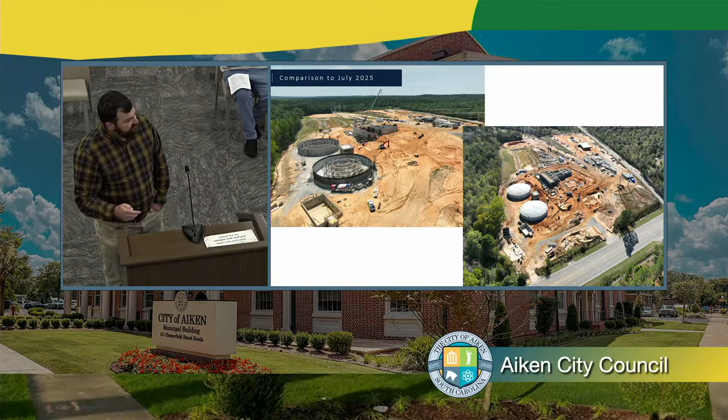The treatment structure concrete being complete is a big milestone for us - the concrete's poured out, that's the heart of the plant. There's a lot that goes into that. You see a small portion of the concrete, there's a lot underground, but that's now done as far as the structural concrete. The in and under for the water treatment plant, admin, and chemical building is on the right side of this photo. I'll get a better photo later to show that.

Clearwell and high service pump stations are now complete. The utility building masonry is done, roof is done - we have a photo of that as well. And the intake pump station on the other side of Highway 1 has now started.

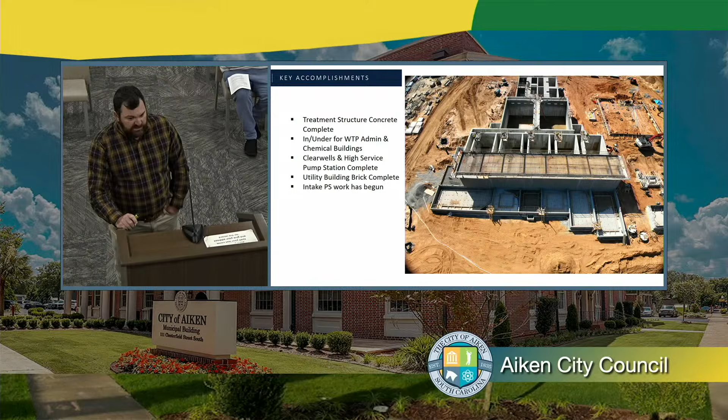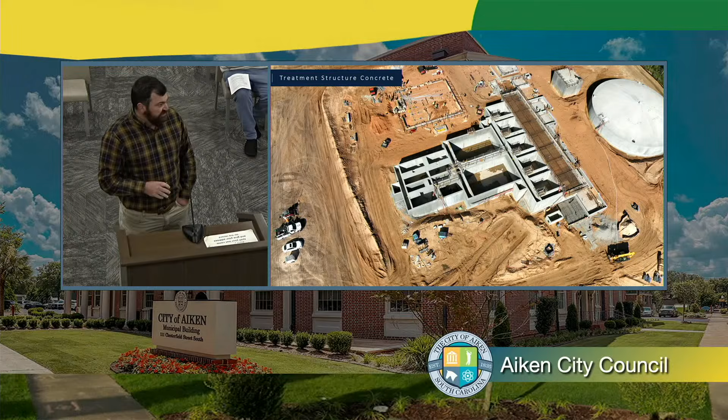So treatment structure - this is a pretty neat picture, it shows you the whole treatment process. Over here to the left, the small box is where the water will enter - that's your rapid mix. It goes through your flocculation, then your sedimentation, and then your 5 filters at the end before it leaves the treatment process. On the back end here is where your bulk chemical tanks will be, and they'll all feed into the chemical building up here on the top. Now that that is complete, you really see the flow and the process through.

Next phase, and I'll get into this a little bit, is a lot of the equipment that goes into it will be installed by the next quarter.

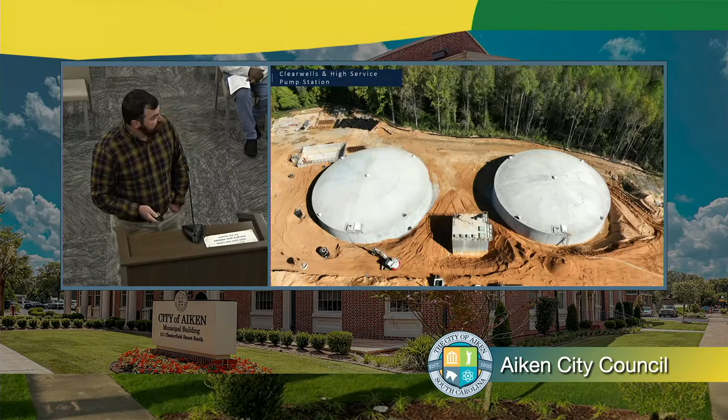Clear wells and high service pump stations - these are 2 one-million gallon clear wells each. Like I said, the one on the right, number 2, has now been tested and passed. The one on the left is currently being filled, and that should be tested and done this week. You see some backfill around these clear wells, which we've started to do.

Utility building - masonry is complete, the roof is now on and done. Coming up we'll have windows and doors. All the HVAC and electrical rough-ins is completed in that building as well.

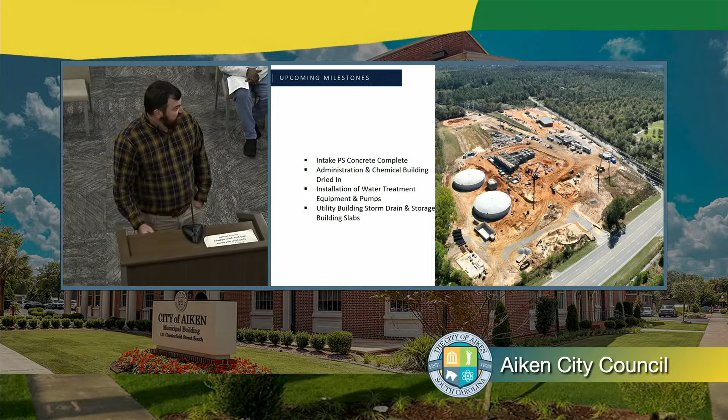Upcoming milestones for the next quarter: the intake pump station concrete will be complete. I'll show you a photo of where we're at with that. The admin and chemical buildings will both be dried in. We're actually pouring those slabs next week. Then the equipment and pumps, utility building, storm drain, and storage building slabs. There are two storage buildings over at the utility building.

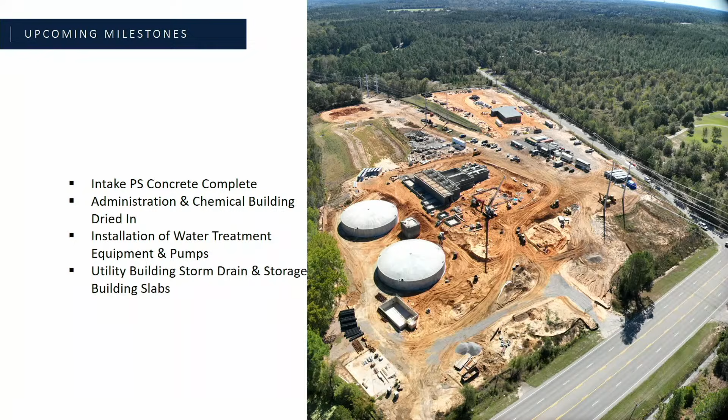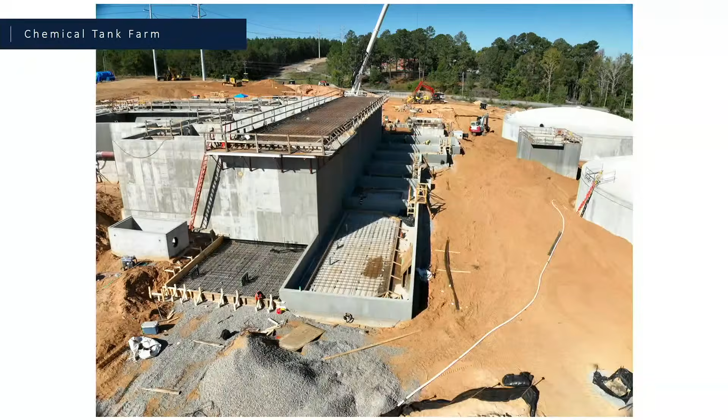This is the back end of your treatment structure, the chemical tank farm. Some of this concrete has already been poured. These photos are about two weeks old, but in this whole area next quarter, the tanks will be delivered, set in place, and a lot of the plumbing will be done for those.

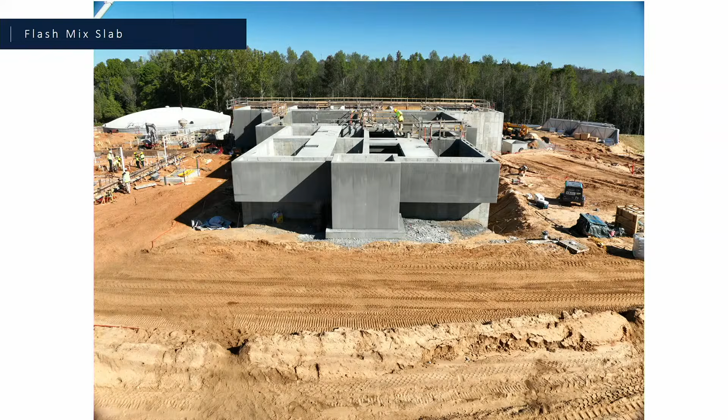Flash mix - this is looking down your treatment structure from the flash mix. You can see we've got some Thoroseal rubbing on the walls. We take the concrete when it's formed up - you see on the far right here the rectangles of forms - but this is the finished product. We spray it, and it looks more cohesive in the end.

Can I ask a quick question? What is the height of this structure, and what is the depth? I always wonder that, and I never ask. Sure, so this structure, if you could walk up to it, is probably 12 feet from this slab at the high end. On the very back side, it's about 22 feet from the top down. This will be backfilled up to right under where you see this cantilevered slab, and all of this will be backfilled around. There'll actually be a road that runs right here when we're finished.

And what's the depth? Is it really deep into the ground or not? The structure is 22 feet. The pipe under it, you're probably up to 26 feet by the time you get there, because there's a 24-inch pipe under that. This was built kind of into a hill - when we started, there was a hill there, so we utilized that hill to be able to build into it instead of having to dig a 26-foot hole.

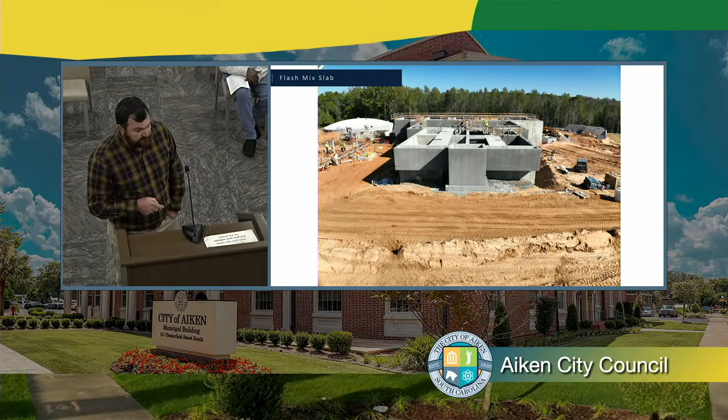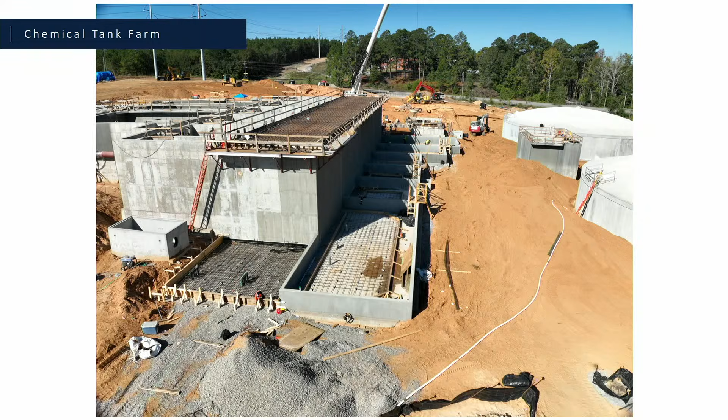Can I ask you - on the one before this, the chemical tank farm, is that where you add chemicals to treat the water? It will be. The bulk chemical will stay here, and inside your chemical building you'll have day tanks. You transfer from the bulk tank to the day tank, and you'll store, depending on the chemical, a couple of months, maybe up to six months. So that's where all that'll be housed - there'll be piping running along this wall carrying everything to your chemical building.

Here's a better look - your chemical building will be here. This is where your day tanks and chem feed pumps will be housed. Your on-site hypo generation - taking salt and making it chlorine - will be in this location, this sump. And your admin building is located here for the water treatment plant. These two slabs, like I said, will be poured next week, so that's really going to start taking shape.

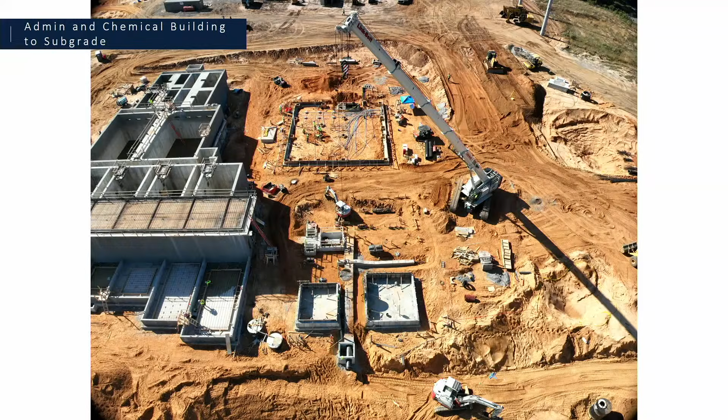Overall schedule: original contract was 791 days. We've had a few weather days, but as of right now we haven't really pushed to get additional days because we're holding strong to that February 8th completion. We are 40%, maybe 40 to 41% complete. Our goal is that we are producing water by the end of 2026.

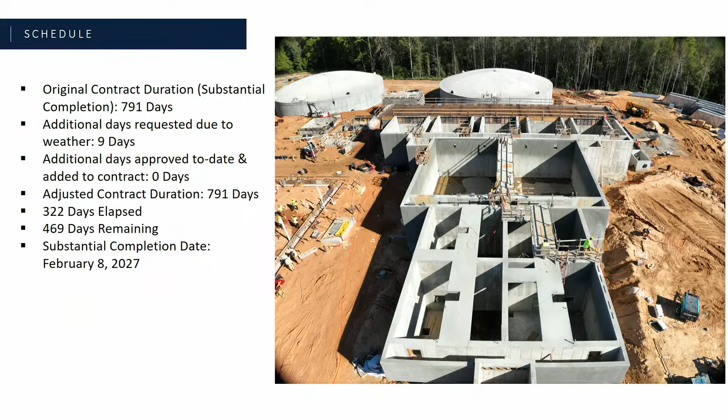And how are we with the budget? We're on time. Are we on budget? Yeah, we're on time and we're on budget.

All right, thank you, sir. Looks like a lot. You're a little bit farther along though. I was sort of hoping it would be before February 2027. We're waiting patiently. That's right.

There's a lot of equipment that goes into that. It's interesting, when you build these plants you see a lot of concrete going up and you feel like you're pretty close to the end. But really getting in there installing the equipment and going through testing takes a lot of time and effort. So we will enter a startup phase sometime in August, but that's how long it takes to start up a plant this size.

Thank you. Thank you so much. Thank you, Nick.

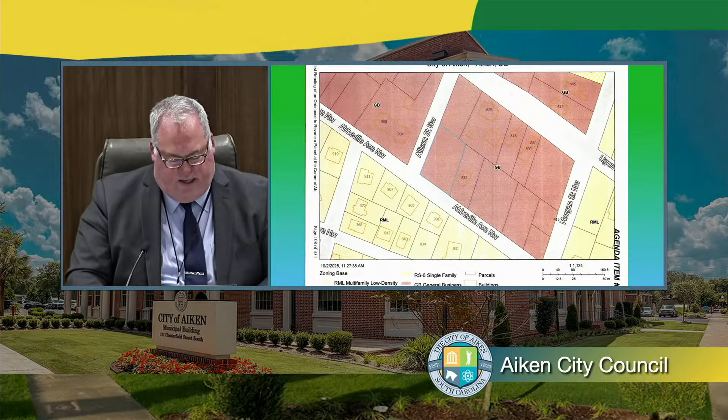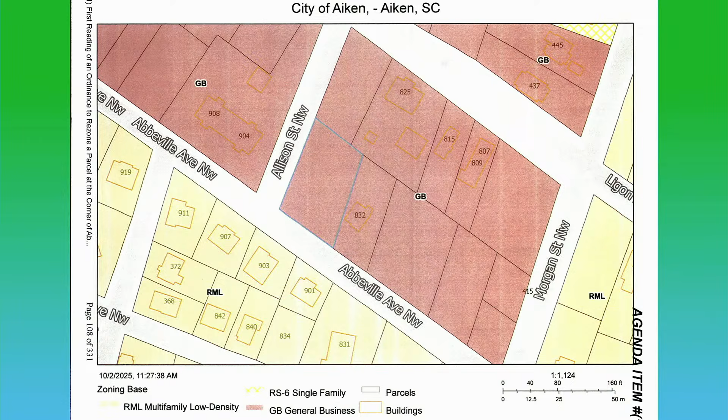Mr. Bedenbaugh: Thank you. It is an ordinance amending the zoning of real estate located at Abbeville Avenue Northwest and Allison Street Northwest from GB General Business to RML Residential Multifamily Low Density. The applicant is requesting this rezoning. The comprehensive plan future land use map designates this property as residential, so it fits in with that. The intention is to develop the property for a duplex. The existing land use pattern of the immediate area is residential, but the current zoning of GB restricts residential use, so rezoning would allow the intended residential use by the applicant. Those present at the Planning Commission at their October 15th meeting unanimously recommended that the parcel be rezoned from general business to residential multifamily low density, and it is before you for first reading this evening.

Thank you. Is there a motion? So moved, Mayor. Councilwoman Gregory made the motion. Madam Mayor, I'd like to second that motion if you don't mind. Councilwoman Price seconds the motion. Any comments from the public?

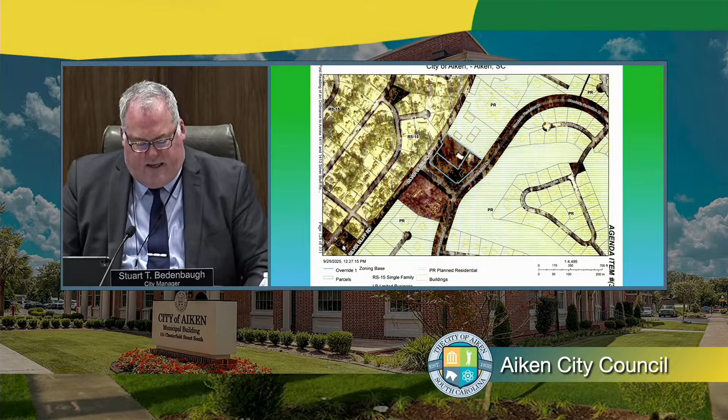Next is first reading of an ordinance to annex 1411 and 1413 Silver Bluff Road and zone them limited business. Mr. Bedenbaugh: it is an ordinance to annex property located at 1411 and 1413 Silver Bluff Road and zone the same LB, limited business. The applicant has requested annexation of the two parcels, surrounded by multiple parcels within the city limits. There's an office and a stable on the properties. The parcel at 1411 Silver Bluff Road contains approximately 1.65 acres, and 1413 Silver Bluff Road contains approximately 2.01 acres. The proposed zoning is limited business. Those present at the Planning Commission, with one abstention or recusal, unanimously voted to annex the property into the city and zone it limited business. This is before you this evening for first reading, Madam Mayor and Council.

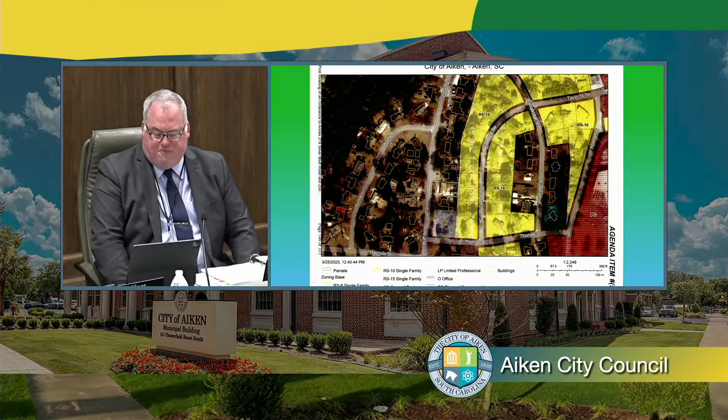Is there a motion? So moved, Madam Mayor. Councilwoman Brohl made the motion and a second from Councilwoman Gregory. Any comments from the public? Comments from the council? All those in favor? Thank you.

Next is first reading and public hearing of an ordinance to annex 38.9 acres located on Edgefield Highway, Williams Lane and Union Church Lane, zone it planned residential and approve a concept plan. Mr. Bedenbaugh: Thank you. This is an ordinance to annex property located on Edgefield Highway, Williams Lane and Union Church Lane, and to zone the same planned residential and approve the proposed concept plan. This is approximately 38.9 acres, and the applicant has requested annexation and approval of a concept plan.

Since it is larger than the required minimum acreage, it must comply with planned residential zoning, which requires a concept plan. This plan calls for a 131 lot single family residential development. Lots ranging in size from 5,875 to 8,375 square feet, with a proposed density of 3.37 lots per acre.

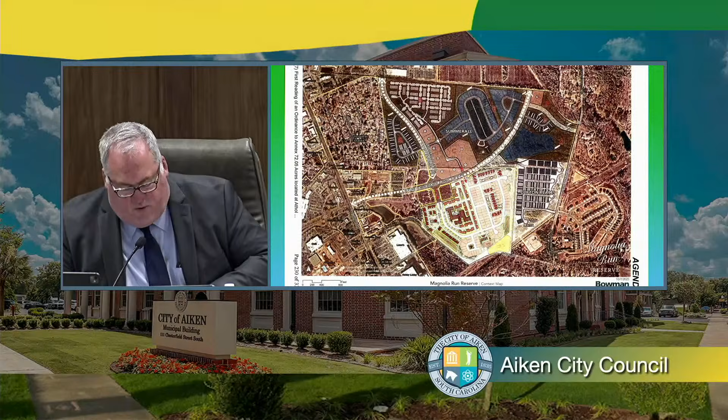And this is before council this evening, Madam Mayor, for first reading.

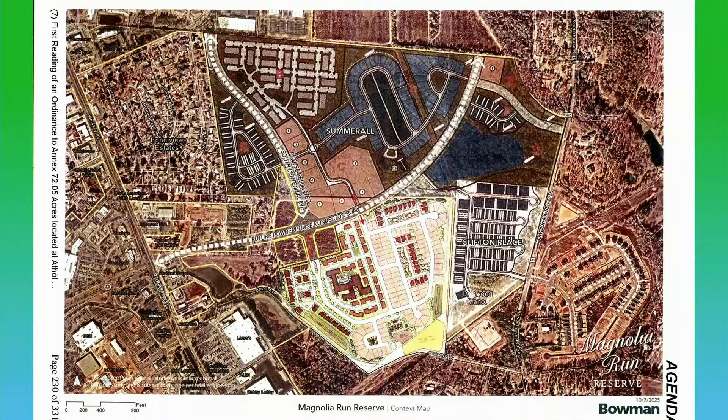Let me comment. When I looked at these proposed design plans, the first thought was whoever prepared them and the McLean family, I was wondering whether they were thinking as they reviewed it over and over, would I want to live in that kind of area. That is what I see in viewing this. This is something that they would want to do, given the fact that if they moved out of their homes, that's where they want to be. And really, some designs can't make it 100%, but should be representative of, would I want to live here if I had to?

It's a form of the golden rule. It is, and that conversation we've had many times with the family and the team. There's a principle there that's good to follow, but also when you do that, you create long-lasting value. So there's a benefit to doing it that way. It is a win-win.

Joel, Marianne, Doug, I just have a couple comments. I've heard very good response from our district, District 5, regarding this project. Had a couple calls regarding it. And somebody made a comment to me that just jumped out, and they were 150% right. They said this is a perfect continuum for retirement after Woodside. So that's kind of where their heads went, is, you know, they live in Woodside, they're busy upkeeping their home and stuff, and this is a great next phase for them.

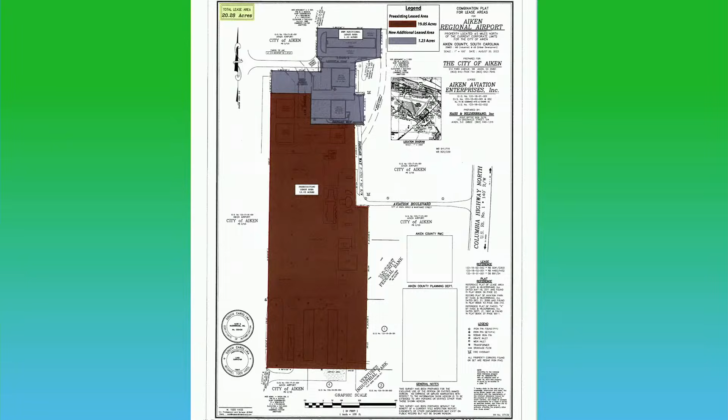We had a discussion earlier in the meeting, earlier in the day about this with council, and we have this modification in front of you this evening, Madam Mayor and Council. Thank you. And I do want to note this also has been done in concert with the fixed base operator and was approved by the General Aviation Committee with their recommendation.

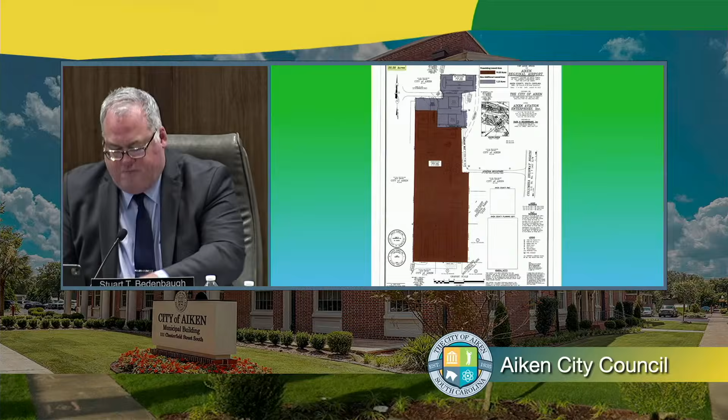Thank you. Is there a motion to accept? So moved, Mr. Council, Madam Mayor. Councilwoman Price made the motion, and I'll second, Madam Mayor. Councilwoman Brohl second. Comments from the public? Any comments from council?

All those in favor? It's unanimous. Thank you. Motion passed.

Next is first reading and public hearing of an ordinance to adjust the city's annual budget for several items, including a public services HVAC replacement, mosquito truck replacement, and the purchase of a parking lot adjacent to the Center for African American History, Art, and Culture. Mr. Bedenbaugh: Thank you. It is an ordinance amending the budget of the city of Aiken for the fiscal year beginning July 1, 2025 and ending June 30, 2026 for the General Fund, Solid Waste Fund, and Franchise Fee Fund.

We have several things. We first have replacement of the mosquito truck. Part of that cost is offset through insurance proceeds. We were involved in a collision that wasn't the city's fault. Also, the primary HVAC unit servicing the Public Services Building on DuPont, which is approximately 50 years old, needs full replacement from the Building Depreciation Fund.

And as we discussed, the First Baptist Church would like to purchase—they're consolidating some of their properties, and they approached the city about us purchasing the parking lot that we currently have a lease with them on. We entered into a lease with First Baptist in 2011, and it was extended in 2021 for 5 years. It runs till, I believe, July 1st of 2026. First Baptist would like to, again, they approached us about purchasing the parking lot. We did make investments 15 years ago, putting in curb and gutter and paving and striping and city lighting. And frankly, it is used quite a bit by the Center for African American History, Art, and Culture, a city-owned building. So it makes a lot of sense.